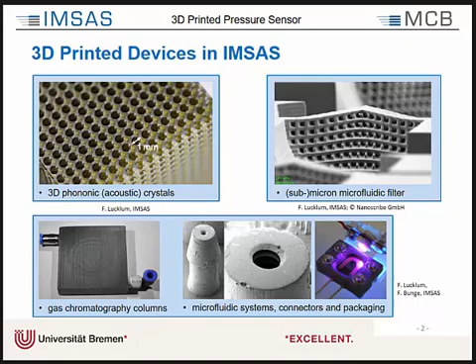He's furthermore focusing on gas chromatography columns, which you can slightly see here. And of course, he's focusing on microfluidic systems to build connectors and for packaging. So he's not working that much on sensing structures itself. But I'm working actually on sensing structures. So my focus is printed sensors for material integrated sensing.

For example, a printed strain gauge on a partially isolated carbon weave. I'm going to present this as a poster tomorrow. And you see the actual strain gauge is integrated in the CFRP beam. Furthermore, I'm focusing on building sensorial workpieces to characterize manufacturing processes. These are printed thermopiles or thermocouples, and this workpiece is then cut to characterize the temperature which is going into

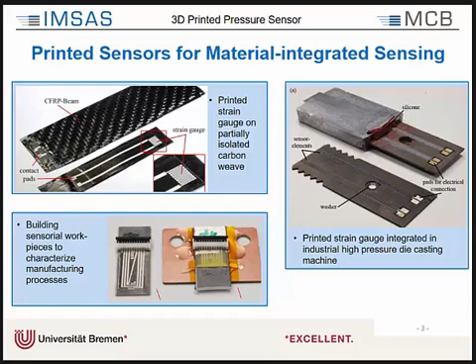the workpiece. Another thing I'm doing is printed strain gauges for integration in aluminum during high pressure die casting, and these are printed strain gauges here, which are then integrated during the casting process. So since we are working together, we were discussing how we can build up printed sensors, and we thought, let's merge our additive manufacturing technologies, and I think that's what many people are doing here.

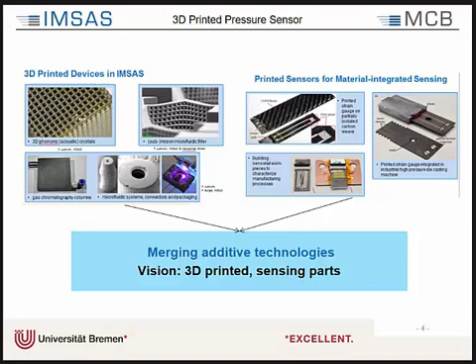It's like a vision a lot of people, like the first presenter Simon, have. It's to build up 3D printed devices, 3D printed sensing parts. And so we had this idea to build a fully printed pressure sensor. Let me first talk about the mechanical part of the sensor. So this is the actual pressure chamber. It's a circular cylindrical cavity. We have integrated fluidic connector ports for the tubing, for the connection.

The cavity height is 800 microns, and the membrane thickness varies between 100 and 500 microns, so the sensor thickness itself is between 1 millimeter and 1.8 millimeters. We have a solid contact pad area here for the electrical connection. We have a symmetrical design for the front and the back side resistors, which we'll come back to later. So the design is symmetrical, and the orientation is vertical during printing, so that we get coplanar front and back membranes. So we have actually two membranes.

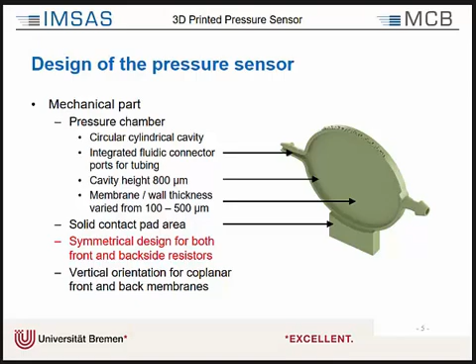The design of the electrical part is very basic. We have two strain gauges, one in the middle, which is sensitive to tensile strain, and one close to the edge, which is sensitive to compressive strain. You can also see the diameter of the chamber, which is 18 millimeters. The width of the strain gauge track is 150 microns, and the electrical path here is 750 microns. We made everything in a half bridge layout. You can see it here. One is set under tensile strain and one under compressive stress, and then we can monitor the bridge voltage.

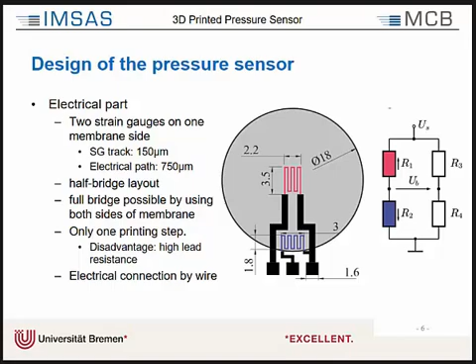And of course, due to the fact that we have two membranes on the front and the back side, it would also be possible to have a full bridge design. The advantage of this design is that we have only one printing step. The disadvantage is, of course, that we have relatively high lead resistance in comparison to the actual strain gauge. And the final electrical connection is done here by wire. So that's the design. So let me come to the fabrication process, the 3D printer.

We have a Perfactory Micro HiRes printer. It's a micro stereolithography, which Simon described in the morning in the first presentation. So it's a lamp, and then with micro mirrors it gets exposed, and the devices are built up. So it's a DLP machine with a resolution of 31 microns in plane, and 25 microns per slice. So the 100 micrometer membrane, that's only 4 layers, and that was a little bit tricky.

We took high temperature resin, HTM 140, which is necessary because for the curing process of the actual sensor, it should be high temperature resin. There are a few challenges. We need precise exposure settings to avoid gelation inside the cavity, because finally there is unexposed material in it, which has to be rinsed out of the system. So we need thorough rinsing of the cavity to remove all the resin. And of course, we should be careful with the membrane, especially when we have a very thin membrane.

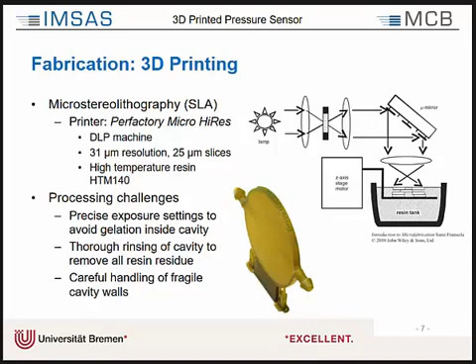The fabrication of the sensing structure was done by low-cost manual screen printing. It's a very low-cost mesh, only €5. We used standard ink from DuPont. It's a stretchable conductor. It cures at 120 degrees Celsius, before which we let it rest 10 minutes for leveling. As I told before, the contact pads were done with copper wires, and we used electrically conductive epoxy, which was also cured at 120 degrees.

And you see our final device here. I also brought this sensor, so whoever is interested in the device, feel free to contact me during lunch or after my presentation.

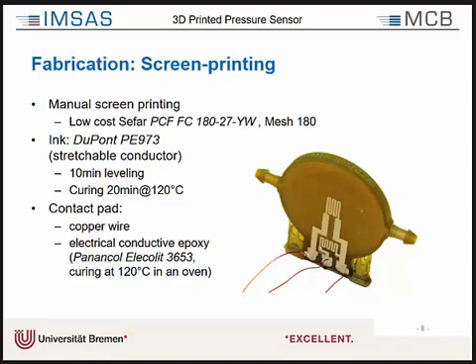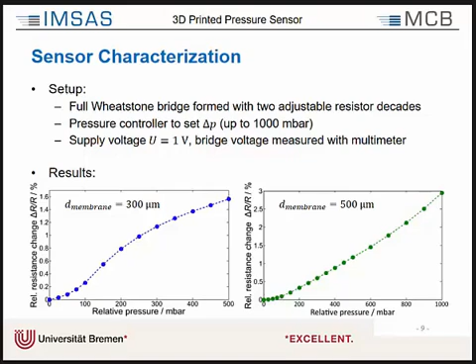This is the membrane thickness of 300 microns. As soon as the pressure increases, there is a change in the resistance. Of course, we do not have a linear response here due to the design; we get nonlinearity. The thicker the membrane, the less the relative resistance changes with pressure, which we also expect because a thicker membrane is more rigid. And it looked pretty smooth. We weren't expecting it to look that nice; we thought it would not be that smooth.

We also did a characterization of the sensor surface, which is very important because we need a relatively smooth surface for the printing process. If we have deep trenches, there might be a risk of membrane burst. The surface roughness was very low, with average roughness less than a micron. We also checked the printed line, which is here in red. The height of the printed line is only 3 microns, less than the membrane thickness, so it does not influence the sensor signal. If we had really thick printed lines, that would influence the sensor signal.

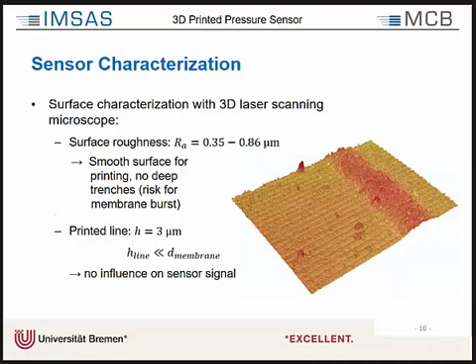Let me come to the conclusion. We showed an idea of combining different additive technologies, microstereolithography and screen printing. What we showed was a proof of concept for a 3D printed pressure sensor, and we got a well-defined sensor response to pressure changes. Of course, that was just the first sensor we produced.

Further investigations have to be made, maybe on two-step screen printing to reduce the conductive leads and to use a resistive paste for the strain gauges. We definitely need a sealing for the sensor structures due to the oxidization of silver. You will see it if you look at the sensor; it's already oxidized. It would be better to use inkjet printing instead of screen printing. You are more flexible in designs, it's easier to adapt,

and you get faster production. And of course, we want to focus on other sensors like vibration sensors or flow sensors, as Simon also said in the morning. Or maybe you have an idea which sensor you would like to print.